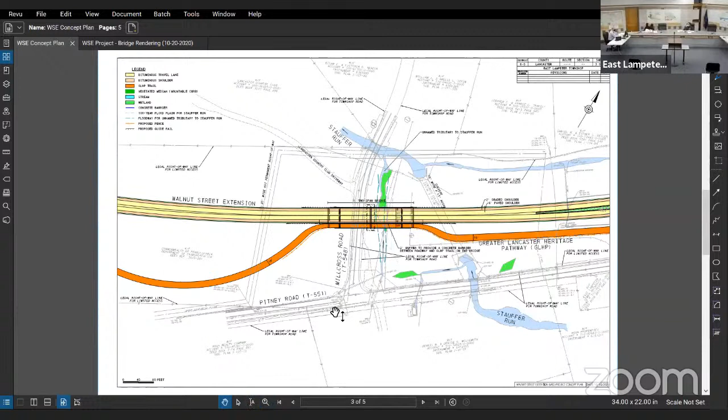Sure, do you gentlemen have that, or can you speak to that more? Yeah, if you could zoom in a little bit on the bridge, Eric. Okay, so at the two ends—this is conceptual, but I think we can speak to it.

The bridge itself has a concrete deck. The road on either side is going to be bituminous pavement. What we're designing to assure against is a settlement of the bituminous pavement relative to the deck, which would create a bump or vertical displacement between the two roads, causing a bumping noise for people in the vicinity. So that's where the approach slabs are designed to prevent that differential settlement and provide a smooth transition from the bituminous pavement onto the concrete bridge, and then back onto the bituminous pavement at the other end.

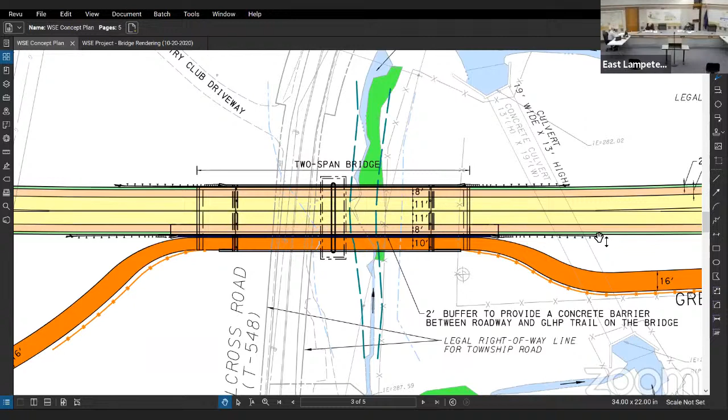Okay, John, further questions on that? Corey, the image that Don and Eric were showing of the rendering, the potential rendering of the profile, if we could just look at that again too, so the public can see this. I know it's conceptual at this point, but great effort, Tony. I just love the way it's coming out. Thank you for all the effort your team's putting into this.

If you've lived in this area for about 50 years, the two ends of this have been there in place for almost 50 years. So we're talking about connecting two higher peaked areas, let's call it that for the general public's attention. Those have been there, and we're talking about putting a bridge that connects this now at this point. So the concept is well presented, Tony.

Thank you. I'm assuming, Tony, that from all we've looked at, there's no public access up to the proposed heritage pathway from Millcross, correct? Correct. Okay, so maintaining safety concerns and so forth, pushing people to the trailheads. Absolutely. Okay, good.

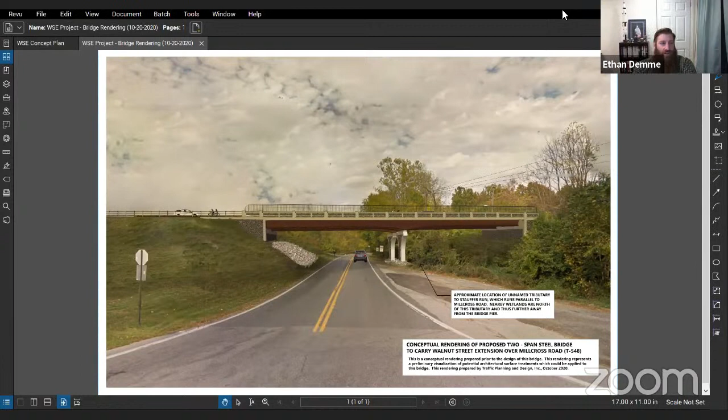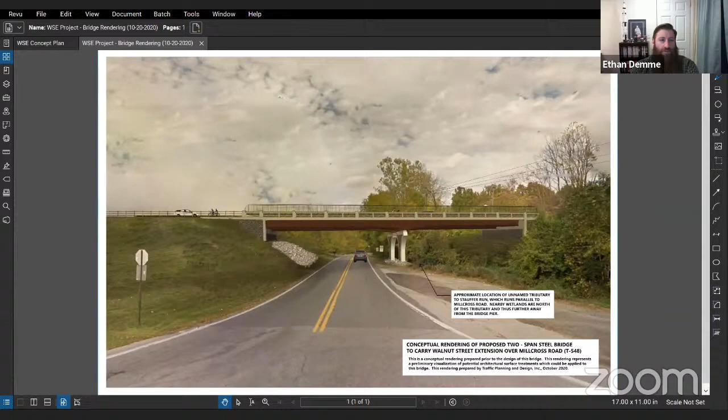Ethan, any questions from you before I turn it over to the public? Yeah, one question. You mentioned you were in the process of doing a sound study which would be submitted to PennDOT. Is there a link once that's available that the public could view, or a way we could get a copy to post on our website? Yeah, once the results are something we'd consider final, we can submit a copy to the township, which I assume would then be available to the public. That would be great, thanks.

We can, yep. Sorry, if I could, Tony, go for just a minute - I would like to echo some of the comments, and they're deeply appreciated, on the work that's gone into this bridge design. This is not what PennDOT would typically build for a bridge of this type and scale of road. A steel spanned bridge like this with the concrete treatments on it is not typical. We pushed hard because we know aesthetics are important - important for the board, important for residents of the township, and important to us to do something special here. So what you're seeing is really the fruit of that, and I'm not trying to pat the teams on the back any more than the recognition you've already given us, but we did push hard to deliver this design for you and do something that's above the norm.

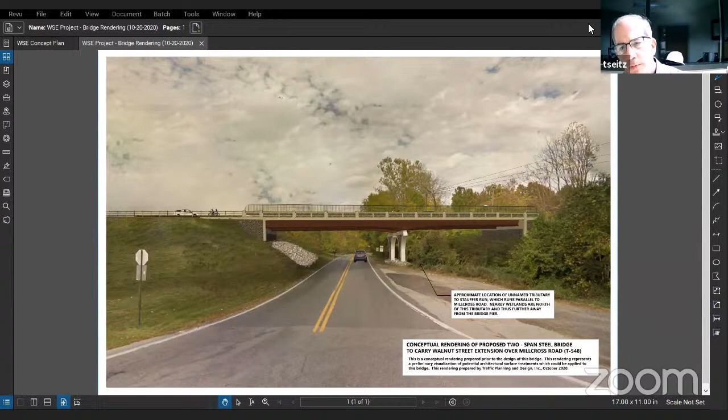Okay, we're going to open up questions from the public. We do have a few members of the public in the room here now, probably for other items, but you're open to ask questions about this project if you have any questions.

Okay, we have one person. If you could just state your name and your address.

Thank you. Russell Pugh, I live at 11 Fox Hollow Drive. I don't know if the question is really for site or for board, but I'm just going to lay it out there.

Oh, Corey, it's almost impossible to hear. Russ, could you get close to it? Can you hear me now? John, can you hear now? Russ, go again. Can you hear me, sir? Yes, that's better. We'll try that. Just speak louder, sorry.

So as it currently stands, the trail section shown on this plan, which again on the southern end would connect to Oak Grove Drive, continue on the eastern side of the extension up to Ben Franklin Boulevard and terminating at a trailhead. This section of the trail is currently being designed in conjunction with the design for the roadway proper.

All of the grading associated with the trail is intended to be constructed in conjunction with construction of the roadway, and the actual physical construction of the trail would be a joint effort between the local municipalities involving East Lampeter Township at some point in the future, with the township taking an active interest in advancing that project as quickly as possible.

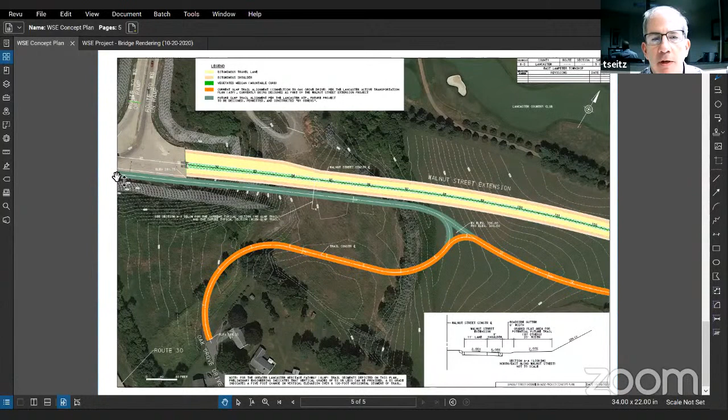Yeah, so this has actually been engineered. You see the interim condition, but then you see the long-term goal or condition that the active transportation plan proposes. That's being engineered to the point where we've graded for that future connection. We also made changes within the interchange area to the design to accommodate that long-term condition, so it's not as far out or preliminary as the area north of the roundabout. There's some real concrete planning for what's going to happen in this area to accommodate that future connection.

Yeah, thanks, Tony, I would agree. I would add, as Tony noted, to the extent feasible through this project, we have designed it to not preclude the long-term separated trail along Walnut Street. This teal color is the area we envision will be available for the trail. We have worked with the city of Lancaster to remove the channelization island as you come north on Walnut Street to head east on 30, in order to shorten crossing distances in the future for non-motorized users, pedestrians and bicyclists in this area. So we have been working to accommodate that long-term goal and not preclude any of that project with what is being proposed in conjunction with the Walnut Street Extension project.

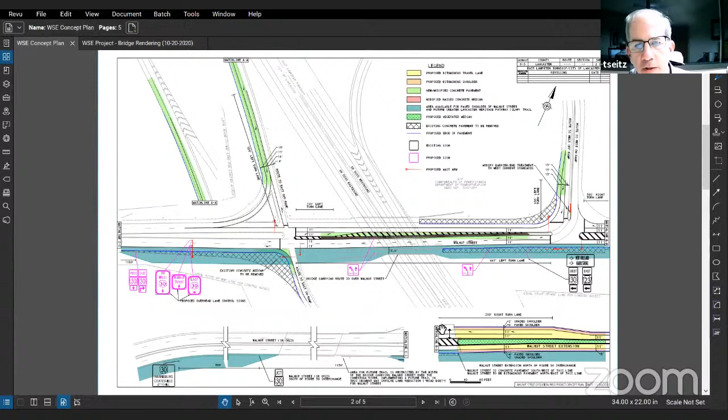The second point I would make is all of what Eric has shown you on the plans this evening with respect to the trail is included in the design. We've talked about the permitting for the project - the trail and the road project will be permitted concurrently, simultaneously, and be ready for construction at the same time. That's the goal. Clearly, the part through the interchange is a later phase, when funding is available to do that, but what you saw in the previous concept plan will be permitted at the same time. Everything you see here will be permitted concurrently.

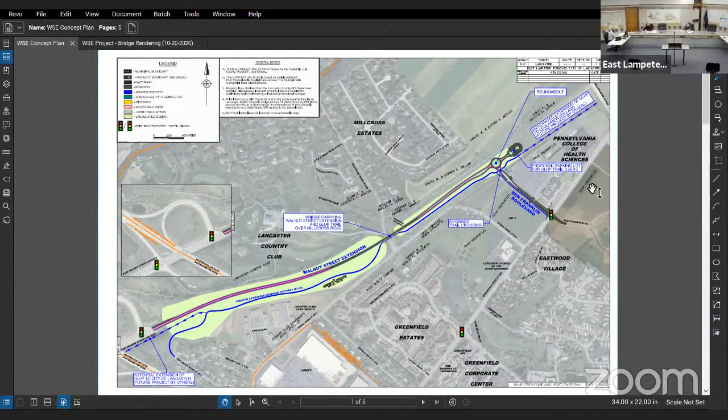Okay, next on the agenda, we have 6A, which is the Devon Creek Phase 2 Land Development Plan 1530. Oh, sure, everything went black here. I don't know what happened. Oh, looks like just a bunch of people are leaving. We'll pause for a second.

What do you see, black? I wonder if there's a loose cord or something. Just hold on one second for those online. Looks like it's stretched a little bit. Oh yeah, it went out on the screen now. It came back. Yeah, it went out for a second. I'll tell you what, there's an Ethernet that's not connected. Oh okay, back. Power's on. Oh, that screen just went out. No, it went back on. This one looks like it's trying to come back. Trying. Okay, now yeah, okay. We're back. I don't know why. It's right down here at my feet. I hope I didn't pick something.

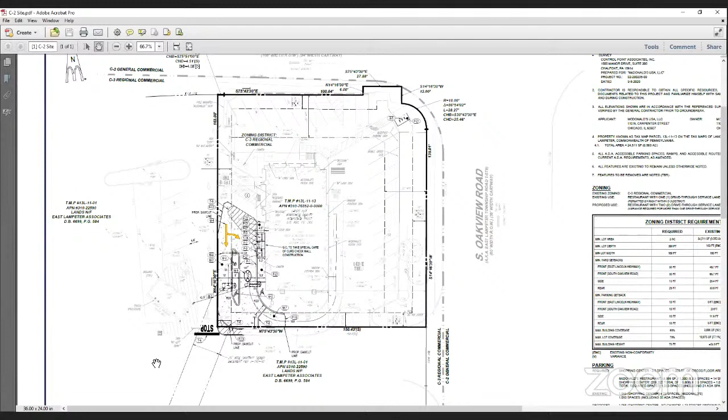Sure, just one additional point with respect to the drive-through. We did have a zoning hearing board regarding this side-by-side drive-through, and that was approved by the zoning hearing board, so with respect to zoning we're all clear on that. We have a recommendation for conditional approval subject to engineering comments from the Planning Commission. The most recent comment letter, if we can find it, from David Miller - it's basically a clean letter, and then it addresses our request for waivers. So let me just pull that up.

So the first requested waiver relates to having a subdivision plan of not more than 10 lots fronting on an existing street, to waive the preliminary plan application requirement.

That's under section 303A. The second requested waiver relates to the plan scale, to have a scale of 50 feet or 100 feet to the inch.

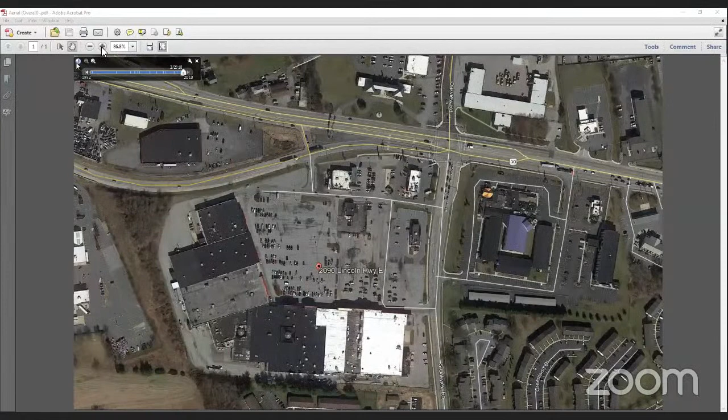So the area in question that we're referring to is along, and I apologize for the quality of the aerial here, but it's along Oakview, South Oakview. There's existing sidewalk, there's existing landscaping between the sidewalk and the curb line. The actual right-of-way of the property is just on the inside of that sidewalk, and you can see there's some landscaping within that area, and there are existing trees in that area.

The comment that we got from David Miller referenced the streetscape plan, and we asked for some clarification on that, and the response back to the request for clarification on exactly what the township would be looking for in that area is that they were looking for a 12-foot wide multi-use path.

The issue, of course, is that in order to put a 12-foot wide multi-use path, you'd basically be eliminating that grass strip between Oakview Road and the sidewalk, potentially ripping out the existing sidewalk to put that path in, and then if it were to go, even with that, I think you'd still need some additional take from the site, which will cause all sorts of issues with respect to impervious coverage.

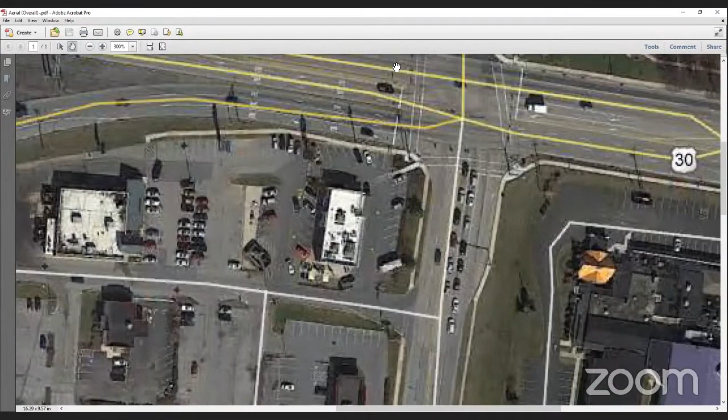But it's already significantly higher than what would be allowed if we were to rip that out and put more pavement down in order to do that multi-use path on site. It's going to eat further into that impervious coverage.

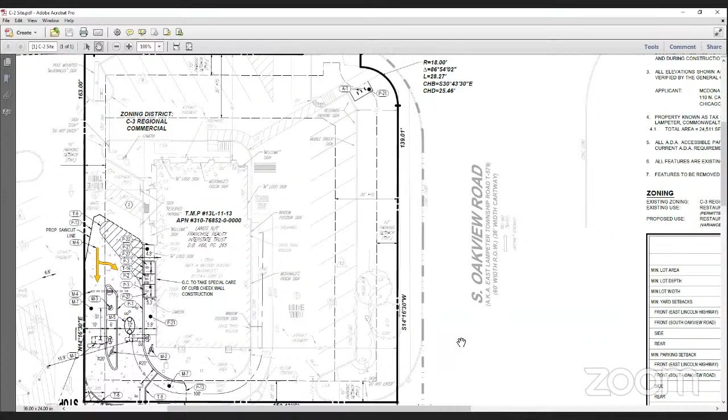So if you move over to the right side, we are non-conforming today, for the board's reference, the requirement within the zoning district is 70%. We're at 77.1. None of the improvements we're doing with the drive-through is resulting in any new impervious coverage. It's kind of a net wash regarding green area being added and some pavement being added. So anything that occurs from the right-of-way line in would necessitate an upgrade or requirement to go to the zoning hearing board for additional impervious coverage.

And you'll see there's that one tree pretty close to the property line on the eastern side of the property. If you're widening that path in there to any significant degree, that tree is going to have to come out. So that was part of this request.

We're looking for a waiver as to both of those improvements along both Route 30 and South Oakview Road. And that really was the only issue—the other comments obviously just comply. So we're ready to move forward with an approval, and we're looking for the board to act on the waivers tonight and grant the approval on the plan.

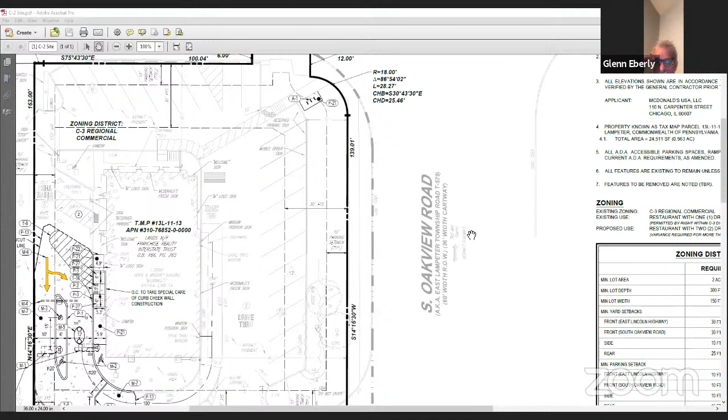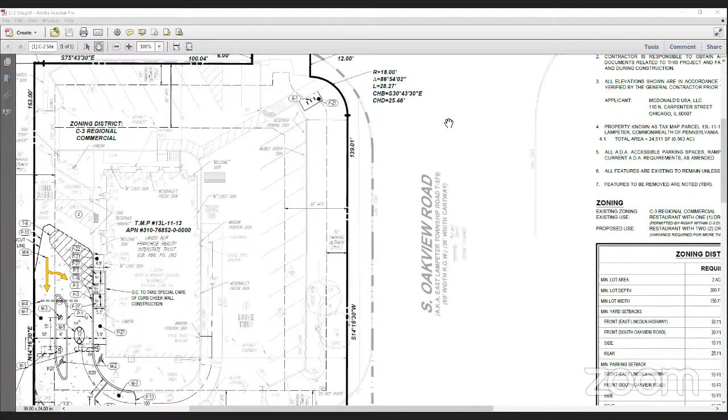Hutch: No, it's shown on the plan up the west side of Oakview. And what would be the challenge of shifting it to the east, Ralph?

I guess you'd have to find a way to cross Oakview Road at some point south of Lincoln Highway. There's a residential development down at the southeast corner of Oakview and Greenfield. There isn't much space available there, although there is an existing sidewalk there. So you'd have to get past that, and then on to the site where the storage facilities are, and then you have a vacant site, currently vacant, which would be redeveloped at some point in time. But there's a rather large stormwater swale just east of the existing sidewalk with some grading challenges there.

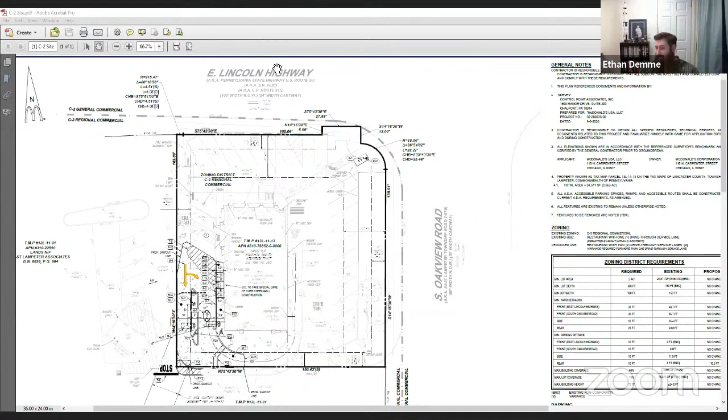I asked the same question. Tara and I both attended that meeting, and afterward I asked Tara that very question, and neither of us heard the one planning commission member who voted against the motion speak to the issue during the discussion at all. That's my recollection as well. I was at that meeting too, I didn't hear any, we were a little confused actually. Yes, I confirm that as well.

Thank you, Tara. Okay, so a motion was made, second, comments from the board. Any other comments from the board? Any questions or comments from the public, including the applicant? Okay, I'm going to ask for a roll call vote.

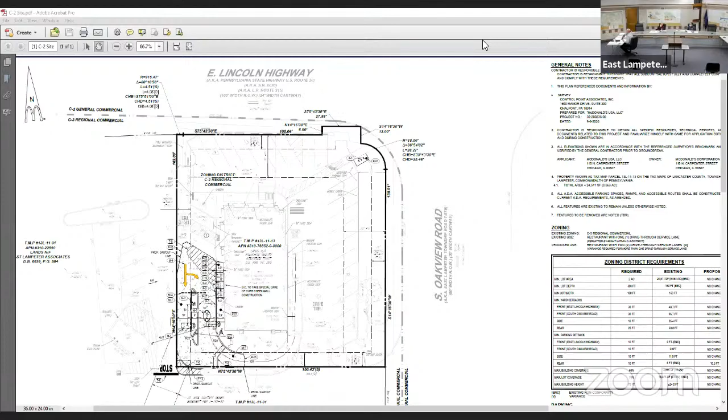Glenn for the motion, aye. Ethan, aye. John, aye. Dave, aye. And chair's aye. Motion passes. Okay, thank you, gentlemen. Thank you.

Okay, next on the agenda, we have no new business. So we have 8A, the 2020 East Lampeter Planning Commission Annual Report. Assuming Tara, you're here for that.

Sure can be. If not, I understand the Planning Commission has to create an annual report each year. They do every year, and have to get it to you by March 1st, and since this is your only meeting in February, here it is. It basically goes through how many meetings they had, the number of plans reviewed and commented on, as well as conditional uses or rezoning requests, things like that. We noted there are 2 new members to the Planning Commission as of November last year, and that John Keeler did not seek reappointment as chair. What the Planning Commission hopes to accomplish in 2021 is to continue with educational opportunities as time permits, make recommendations to the board on typical business, and any other issues the board assigns to the Planning Commission. In addition, we really want to take a look at the subdivision and land development ordinance and changes to that document.